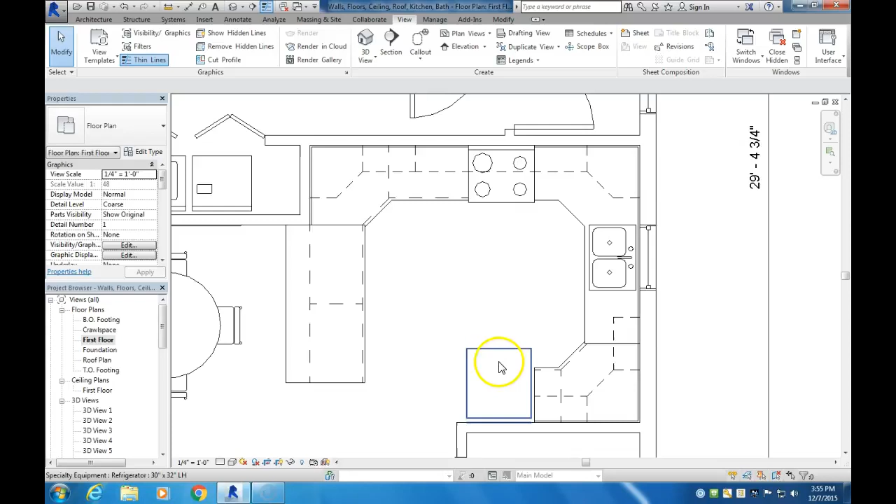And then last, your kitchen is fully furnished, that you have a dishwasher. Mine is underneath this counter. You have a sink, a range, and a refrigerator. So if you're missing any of those things, and the washer and dryer, if you're missing any of these things, pause it and go back and put those in.

You can look at the screen as kind of a reference, so make sure those are in there. So if they're in there, then you're in good shape.

Now we're going to add these to our sheets, so we can print them. Since we are going to make sheets A1 through A3 ourselves, if you scroll down here, you can see there's a ton of sheets already pre-made. We're not going to use these because we don't have paper that big.

So I'm going to just click on this and hit the delete key. You can also just right click it and hit delete. So I'm going to delete A1 through A3. We're going to make our own A1 through A3.

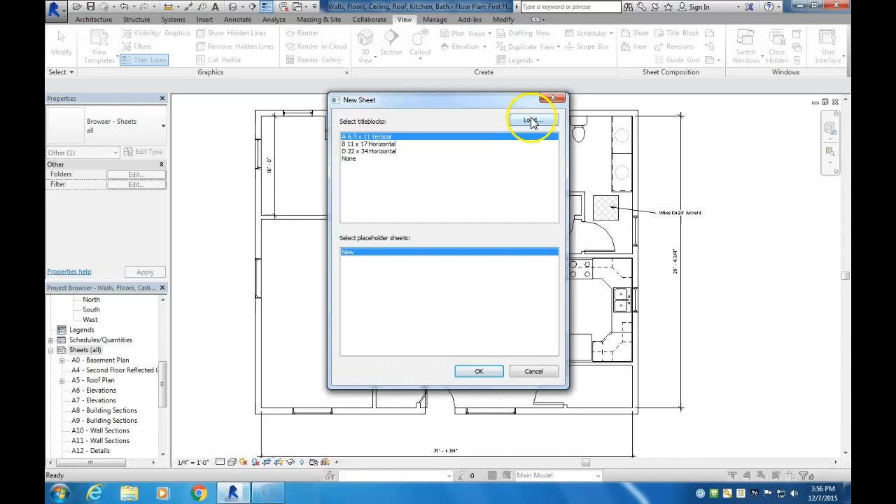So now if I right click on sheets, I'm going to do a new sheet, and I'm going to load, and show you where this exists in US Imperial Library. You go down to title blocks, and we're going to load the A. So you've done this before.

And there we go. So now it put it down, probably called it E3 or something like that for you. I've done a few practice, so let's name this way down to E7.

So I'm going to rename this, and I'm going to put it as A1, and I'm going to call it First Floor Thomas. I'm calling it First Floor Thomas because I want to make sure that I can find this again. So put your name in there. So we got First Floor Thomas.

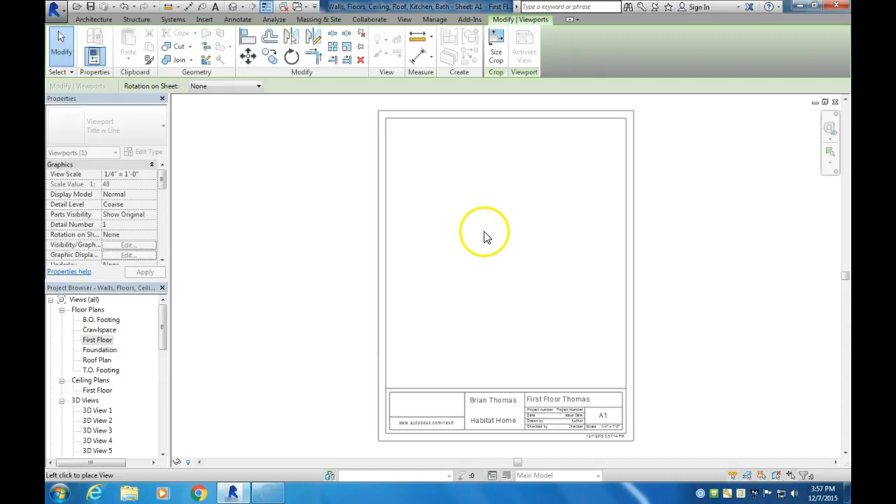Now scroll up to First Floor up here and click it and drag it into there. And whoops, that didn't quite work. I just had to click, it was just waiting for me to click. So that's way too big.

I need to change that scale, and it's likely that you're going to have to use 3/16 to an 1/8. I'm going to see if 3/16 fits on mine. And it is really, really close. I think I can get that to fit in there.

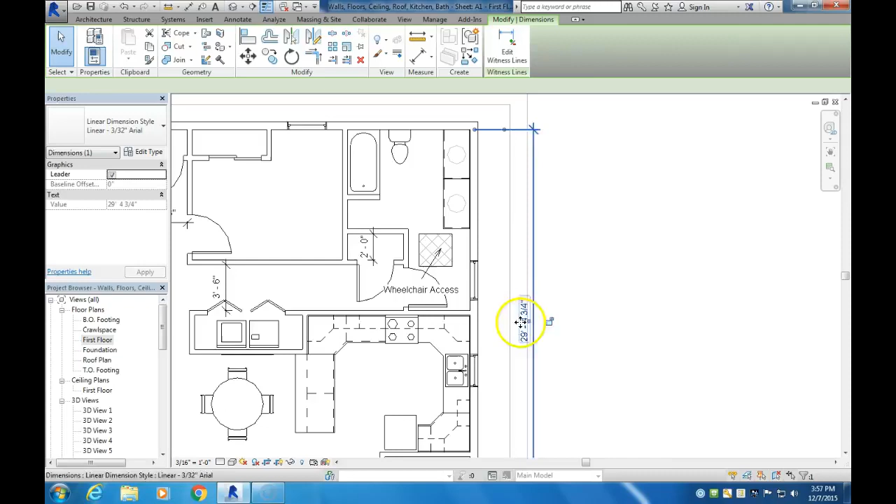So what I'm going to need to do is move this dimension, the wheelchair access thing, in there. I'm going to double click it and double click it. There we go, and now you can see I can highlight individual elements, so that means I can edit this. So if you have a text box that's outside, you need to click this little thing here, move that in there, and then I need to move this dimension in there. So that gives me my first floor on this sheet.

There's a couple other things I need to do. I'm going to go back to first floor, and again, you did this when you did your shed. I had these crop windows that are huge, so they should be showing. If they're not, you're going to have to click this crop region. Mine says hide, so that means they're already showing.

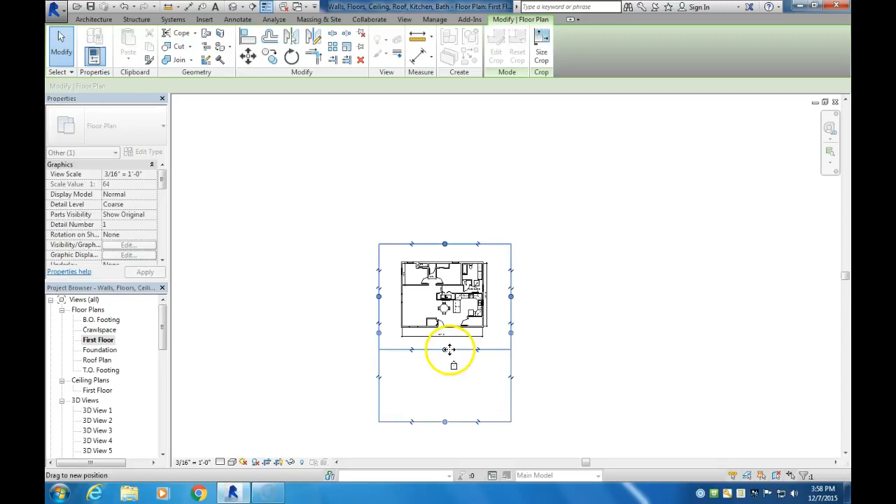So I'm going to drag that in there, so I don't have these little—these are little elevation view tabs, I don't want to show those. There we go. And now I'm going to hide the crop region. So that's the last thing you want to do.

So first floor now looks good. I pulled those dimensions in. Now if I go down to First Floor Thomas, open that up, and open up the sheet itself, that looks really good. So let's leave that one for now. We're going to add our second sheet. So my second sheet, and that should be loaded in there.

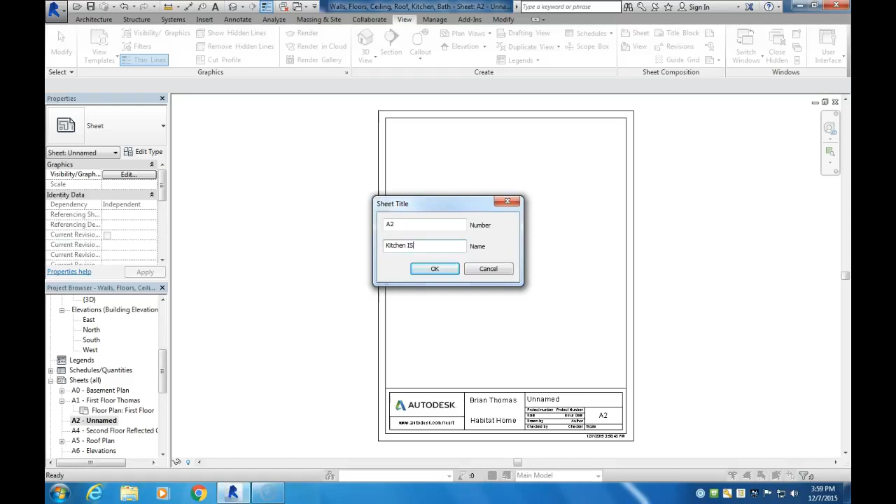The second sheet is going to be called... oh look, for me it put it down as A2. That's great. I'm going to right click that, rename this, and A2 is what I want. This one's going to be called Kitchen.

Kitchen ISO Thomas, because I'm going to get my kitchen view and isometric view. So let's start by just going to our 3D view. If you don't have one in there, I'm just going to click that ISO view.

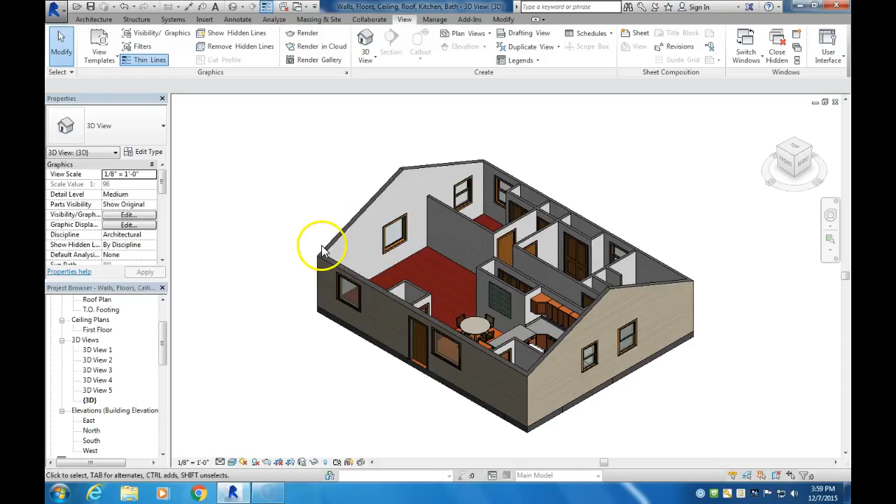Right now my roof is not currently showing, and I want to show my roof again. So if you hid yours, I'm going to reveal the hidden elements, right click on this and unhide that element. Now I click on the light bulb again, and now it shows my house.

I like this ISO view. I want to be able to see your front door, so you can choose either corner. I don't really care which corner you choose, but this is going to show me that you've done your roof slope correctly. So that's my current 3D view.

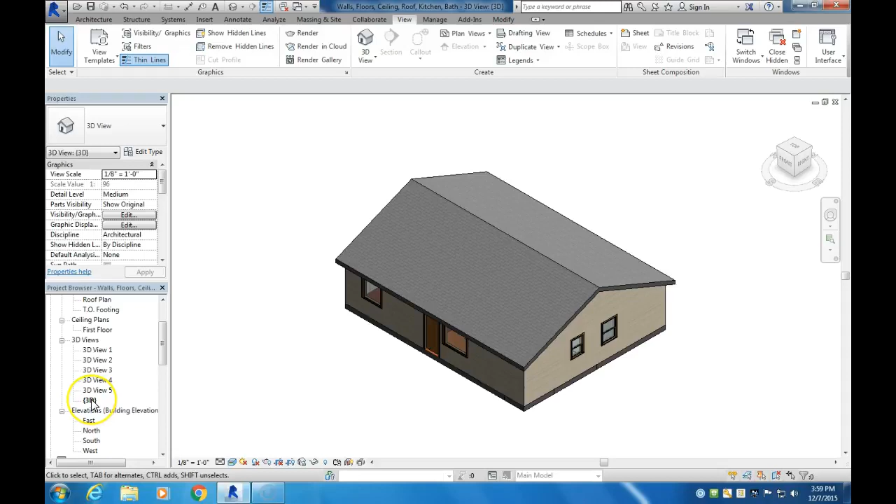I'm going to go back to Kitchen ISO, and put that one in right here on the top. Use the arrow key to slide it up a little bit more, and that looks pretty good. Then if I click on just this little 3D thing, I can move that line. If I click on the building, I get the tabs, I can shrink that up, which gives me a little more space for my kitchen view. So that's my ISO view.

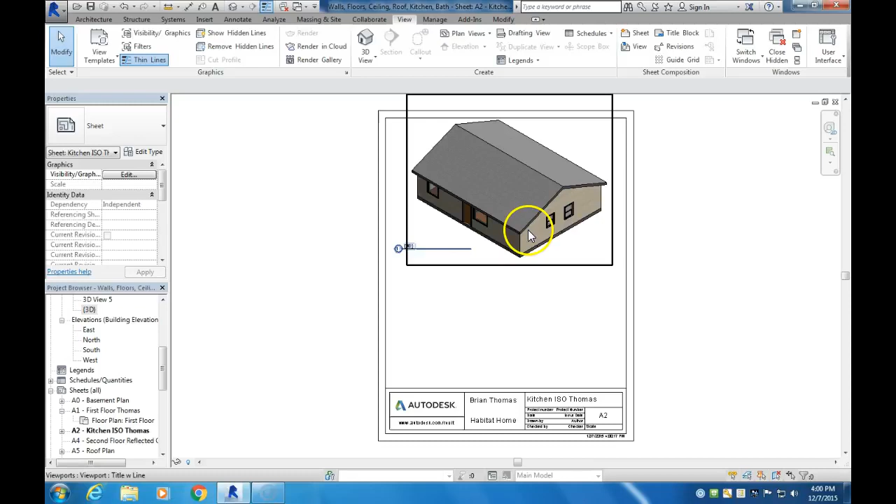Now I want to go to a kitchen view. Hopefully you've done a walkthrough. I've done a walkthrough and created a camera view, but I want to just click camera. I went to view, 3D, camera, in the first floor, and I'm going to click it and drag it to the kitchen. I need to be able to see your kitchen, and that actually shows it pretty good right there. It shows all my cabinets, all the components that I have.

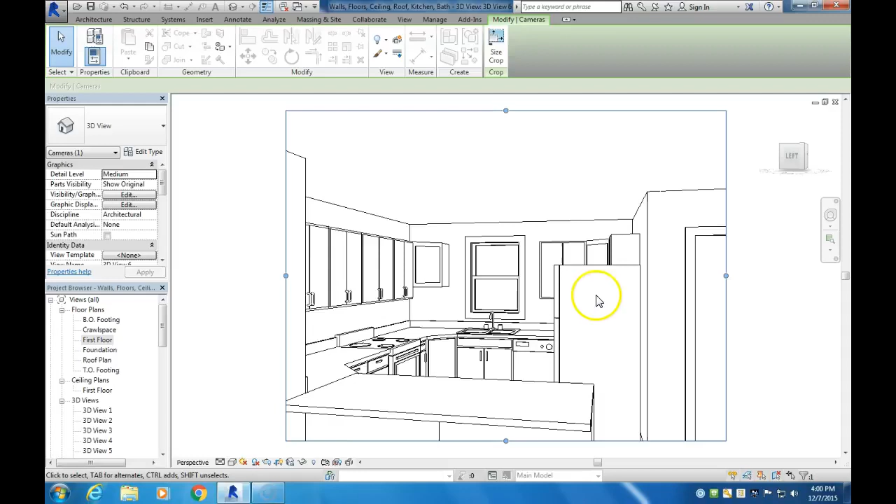Now, if in the end your sink never actually cut out through your countertop, don't worry about that. If it doesn't show really everything you need, you can click this little wheel here and then click look, and kind of move it around. This arrow key is actually arrow left and right, so it's just kind of like a first-person game here. So let me bring it in there.

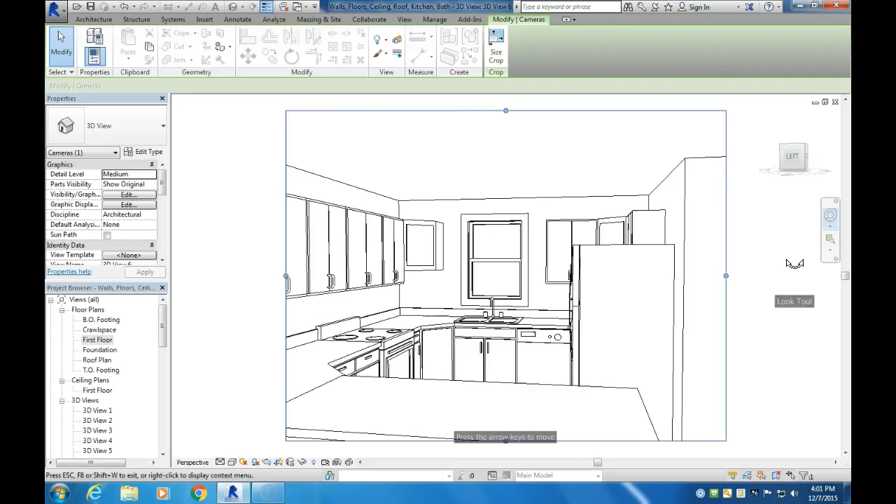That looks pretty good. Now that view is under 3D View 6. I'm going to rename that Kitchen View. And now I never actually want to change that view, because if I change it, it's going to change it on the sheet. So let's go to A2, and I'm going to add Kitchen View.

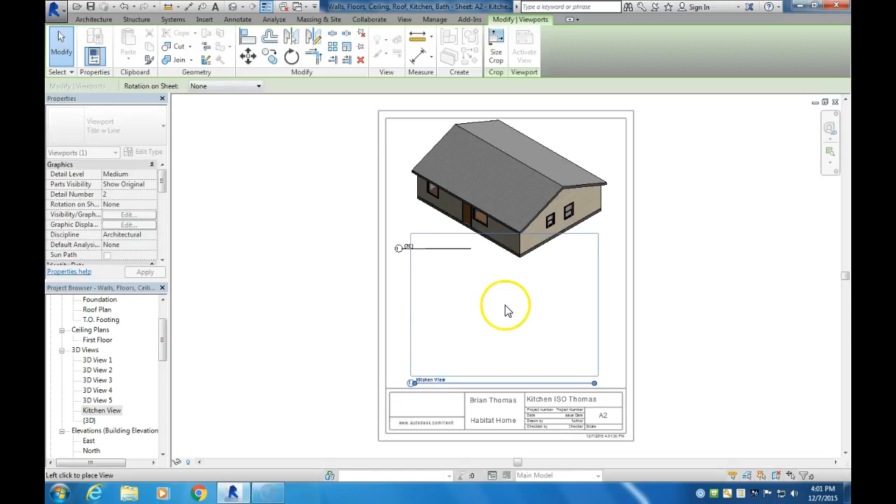I'm going to click and drag that, put it right here. If it puts it on top of your ISO view like it's doing for me, I'm going to use the arrow keys and bring it down as low as I can so it's not blocking this stuff. Then if you go to size crop, the height is 4.5 inches, so let's just make it 4 inches. Delete that, click OK. You can see it shrunk it up a little bit, and then I can drag it down a little more, and click and drag that one up. So that looks pretty good.

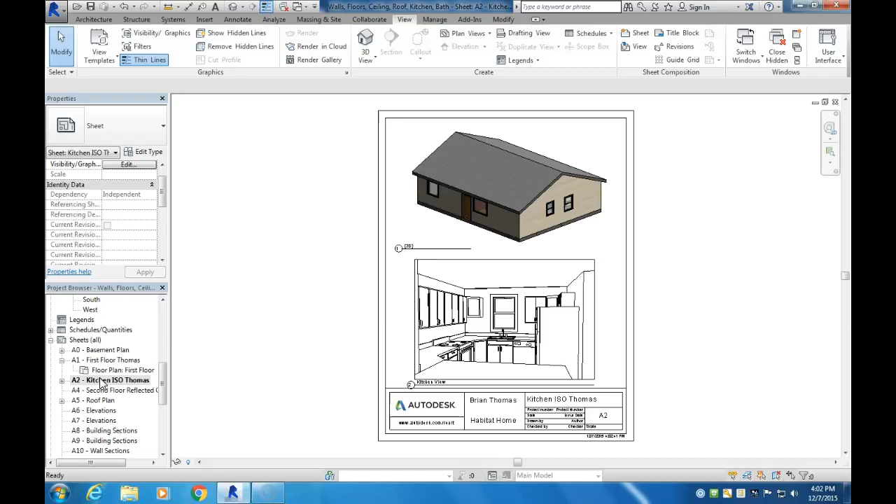Now I get a view of both of them in there. You also have the option to change your ISO view. If I go back to 3D and drag this corner up, you can see it kind of changes that view a little bit. Anytime I change it on the 3D view, it will change it in here. So you really only want to do this when you're ready to print, because if I end up going back to ISO view and changing the way this looks, it will change it on that sheet. You don't want to do that until you print it.

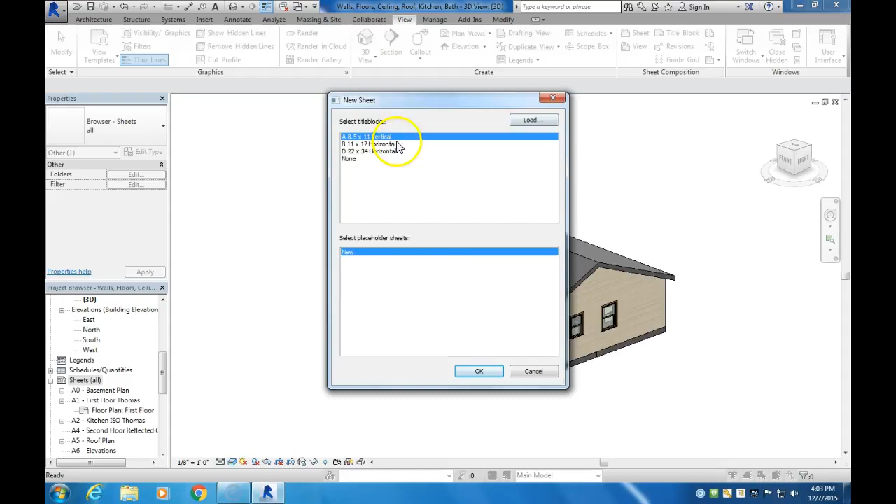Then last, I'm going to right click and do a new sheet. Yes, we'll save this, and we're going to do an A3 that's going to be a section view. So we have this already preloaded. Click OK. Now we need to go back into first floor, and I'm going to create a section view. If I click up here on the View tab, and mine was already selected, then I want to choose Section, and we're going to create a section view.

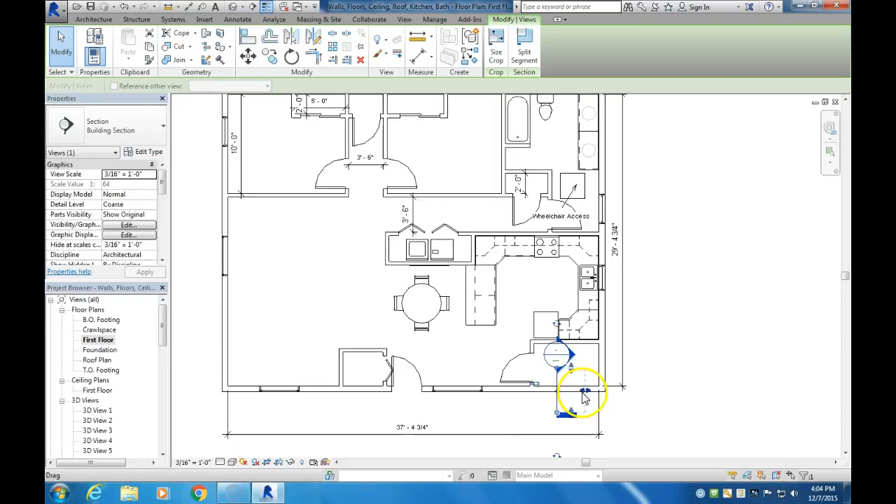You want to do it on the slope part of your roof. My left and right side, those are gable ends, and I don't want a section of that. I want a section from here, so I'm going to click inside the house and then click outside the house. I don't actually need it to go all the way to the back wall, so this little dotted rectangle should not have anything else in here - no windows, doors, nothing, just the wall.

Now when I go down to sections in your project browser, it added a section. If I open that up, this is what it shows - I can see the roof here, I can see all this information. We're not going to individually label all this right now; we're going to save that for after we put in the foundation walls and the footing next semester.

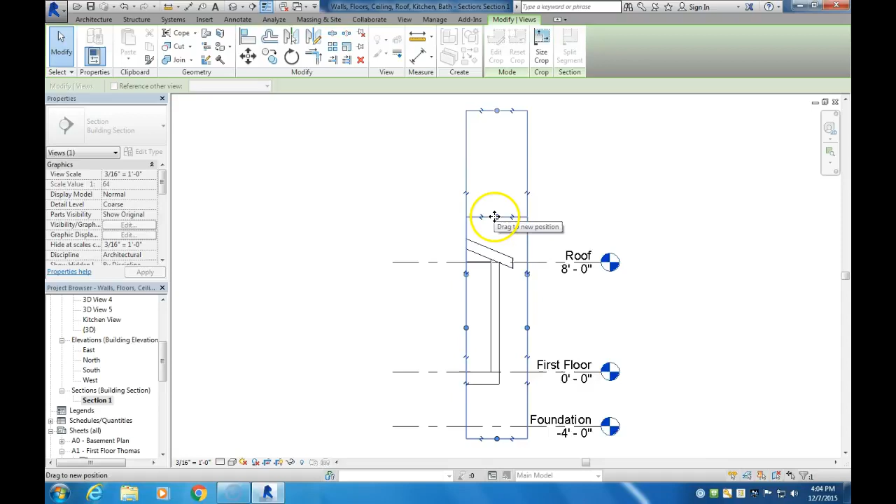So I'm going to drag that crop down. I'm going to bring this one - this one's okay because I want to include the word foundation. That looks good that way. We just need to change this detail to fine, and now what that shows me is that you have the correct wall type.

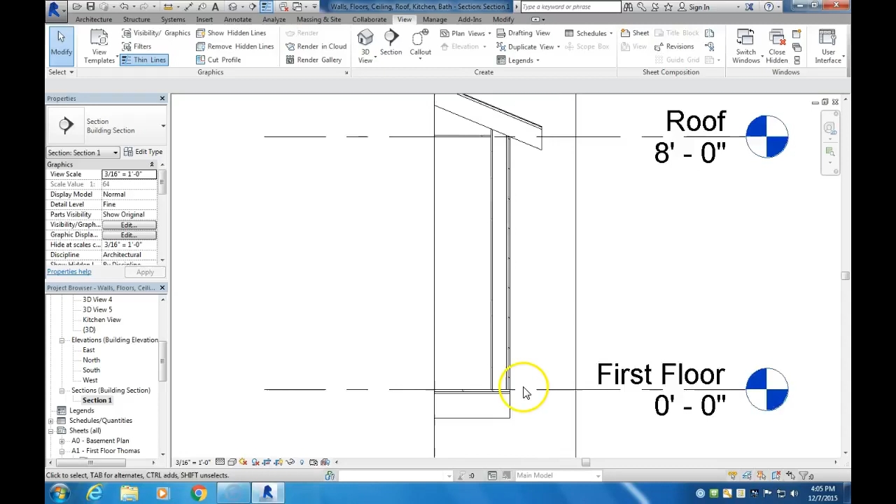It shows me you put a ceiling in, it shows me that you have the correct roof type and that you have a floor and it goes all the way to the outside edge, so I can see all that information. That's important that I can check all that, so make sure your picture shows that.

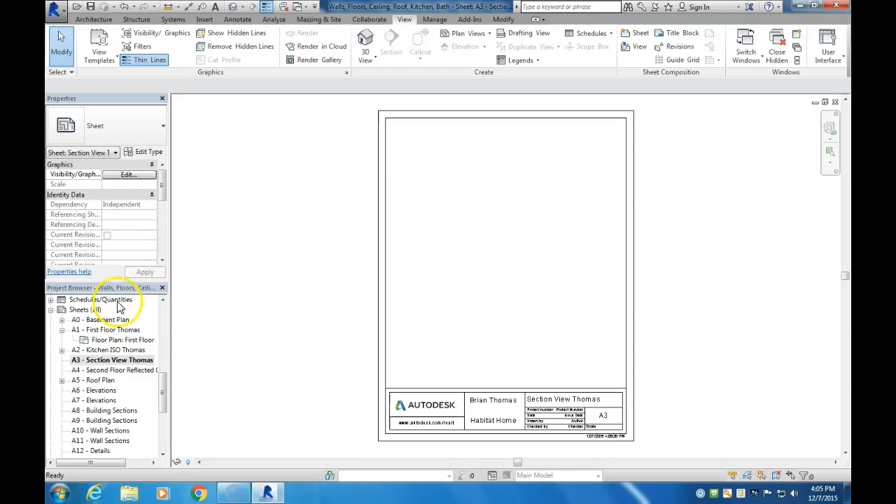Then we're going to go to A3, which I didn't name yet, so let me name that one as Section View Thomas. I'll open that up and then drag in my section view, and since that's all I have, I can make that scale quite large - bigger is up here. I'm going to go to a 1/2 inch and see if that actually fits in there.

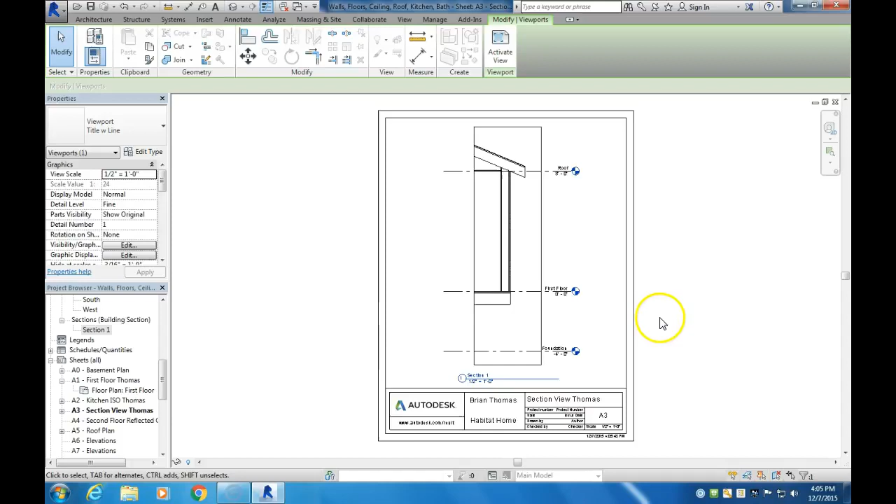And that fits in there pretty well. I can't drag this up here - all I can do is resize that unless I click outside, then I can click and drag that. So now you can see my crop window view is available.

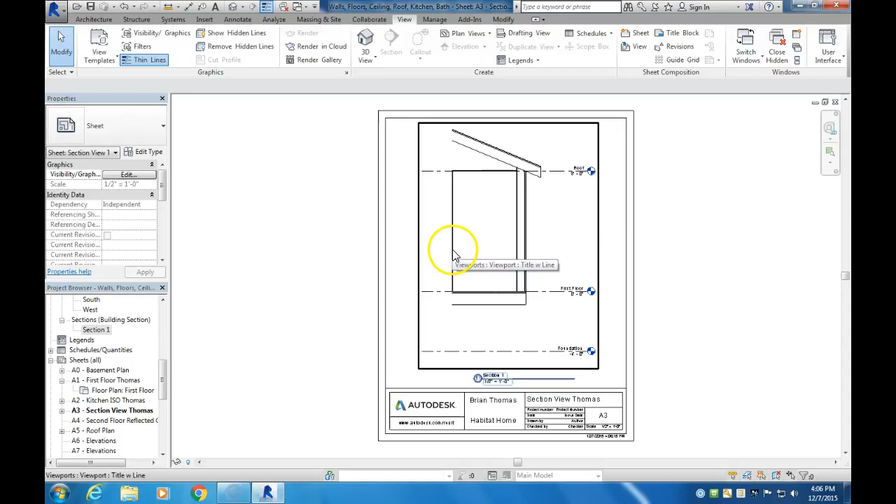If I double click this, I may actually show a little bit more since I have a big sheet here. Now I can hide the crop region and click outside here so the whole sheet is showing, and there we go - that's centered quite well. It looks like this is starting to show the outside edge of a wall.

So if that's the case, you can adjust your crop so it doesn't show that, but that should be all that I need for the section view.

And the last thing we need to do is print these 3 sheets. So let me show you how to print these. But before I show you how to print, one last change.

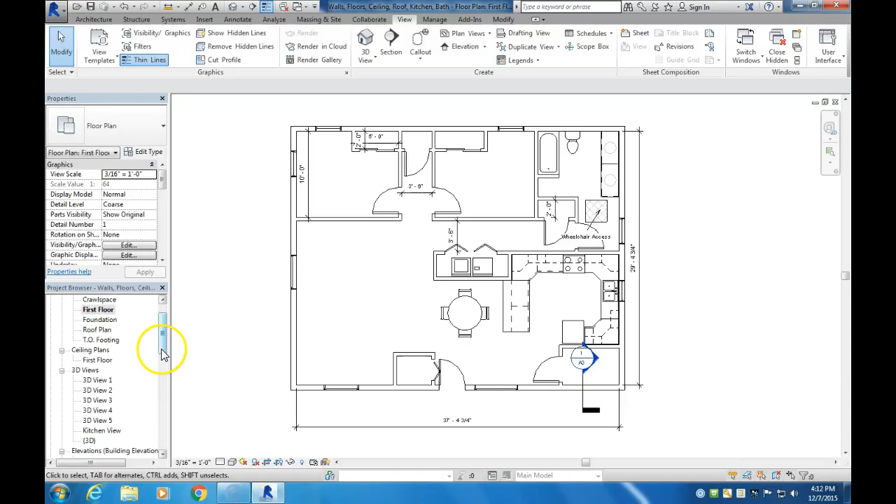Go to your kitchen view and make sure that this is set to consistent colors. That way it prints your kitchen view sheet with shades. It'll be black and white, but it still will be a lot easier for me to see what's going on.

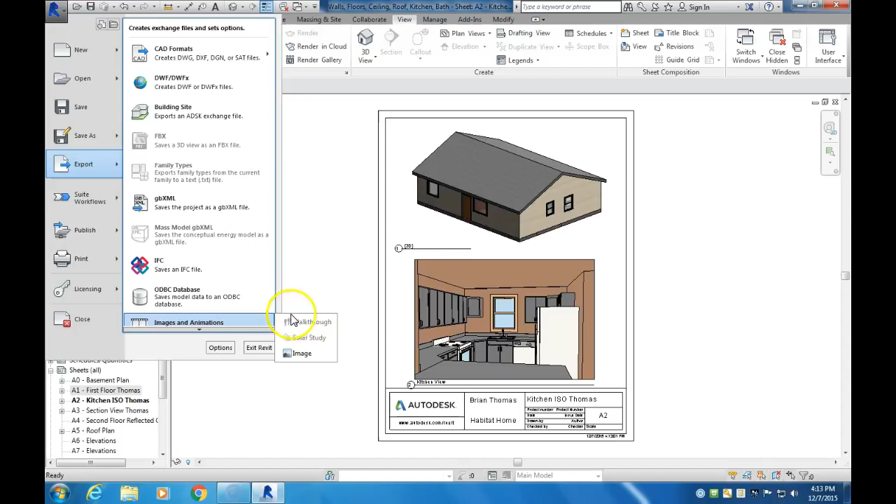So now we go up to the Revit icon and we're going to export this - images, and we do image. It's really important here that you change this and navigate to a place that you can find, so that you know where these files are. You don't have access to save it to the desktop - I do, so I'm going to do that right now just so I can show you really quick where these are.

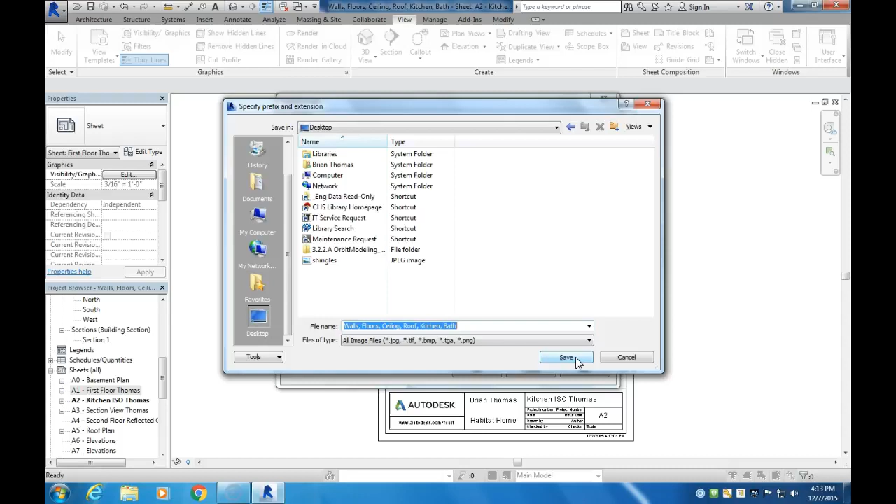So I'm going to save these, select that as the option, and now I want you to choose selected views and sheets. Hit this button here and then click select, then go down and check all of your sheets, A0 through A7, and click OK.

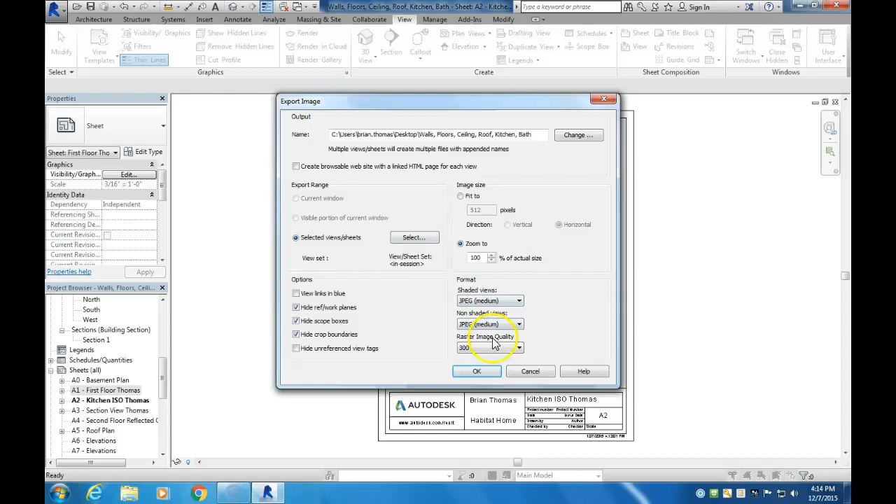And then last, we're going to click on zoom to, this button here, and then change it to 100%, and this should be set to 300. So these are all your presets. Once you've done that, click OK, and now it's saved all of those to your drive.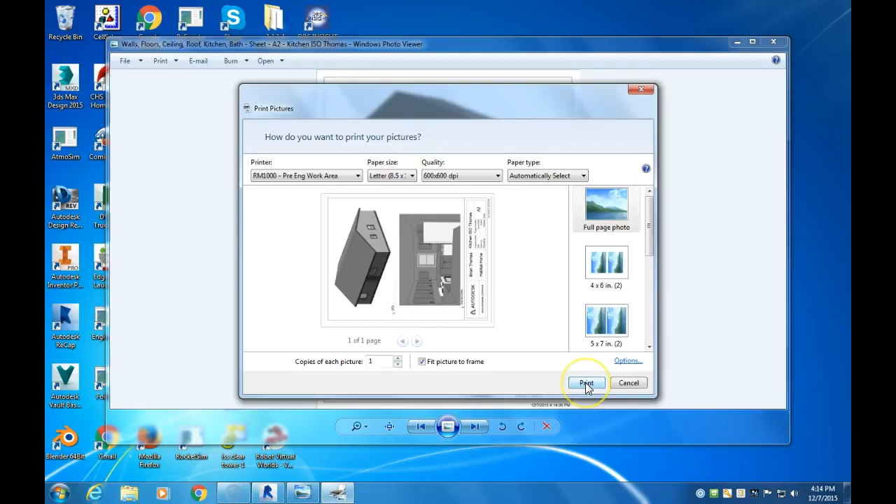So I'm going to minimize this, and these are my 3 things that were saved. I'm going to just open up this one here. Then all we got to do is click on print and just click print, and it will all come out looking fantastic. So that's all that you need to do to get these printed. Once you have that done, turn them into me stapled, and you're good to go.